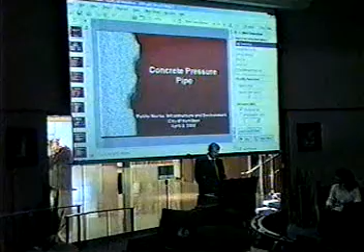My presentation this morning is a follow-up to a presentation you had a few weeks ago regarding the supply of large diameter pipe for your water main. Until very recently, concrete pressure pipe was the sole product specified in the City of Hamilton. The committee has chosen to change that a little bit, and we're here to talk about our products and make sure you know who we are, and if there are any issues with our products, that we're able to address them.

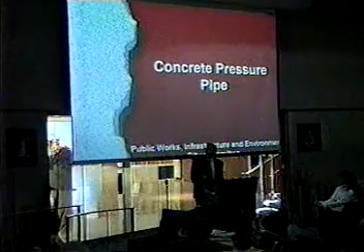I'm going to start this morning. This is our first slide. The second slide is a history of the industry, and you'll notice we track the history of concrete pressure pipe in Ontario from 1943 to present. Up until a few years ago there was always at least two manufacturers of concrete pressure pipe in the province of Ontario. That is again the case, but for a couple of years there was only one, through amalgamations and mergers. So our history goes back to 1943, and it's a product that has stood the test of time.

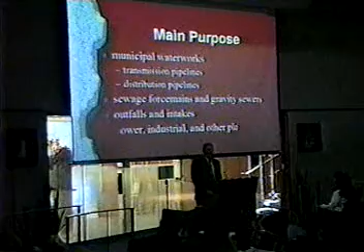The main purpose for concrete pressure pipe is municipal waterworks. It is the primary purpose, and it is in large diameter piping, for distribution mains and transmission mains, primarily for transmission mains, which are the larger diameter.

Morning, Councillor.

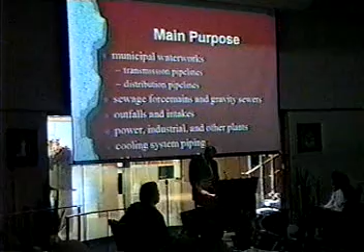In addition, concrete pressure pipe is used for sewage force mains, outfalls and water intakes, power, industrial and other plants, cooling systems, chlorine contact tanks—all very necessary to the longevity of our infrastructure here in Ontario.

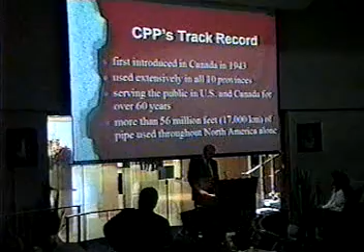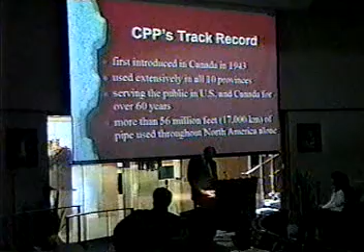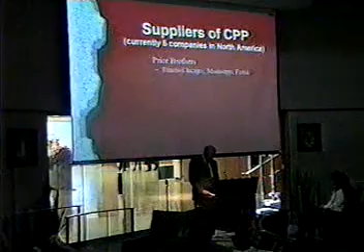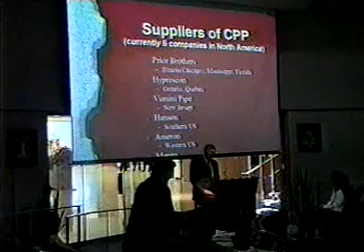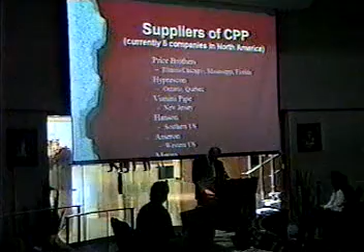The next slide talks about the suppliers of concrete pressure pipe, and this slide is North American wide, but I want to touch upon how concrete pressure pipe is specified throughout Ontario. It is always by open bid. There is always the availability of contractors to use anybody that supplies that product for the project under consideration. And in the last 3 years, the top 3 names on the list—Price Brothers, Hyprescon, and Vianini—have all supplied product in Ontario.

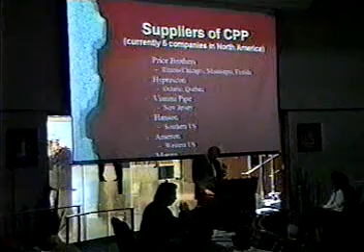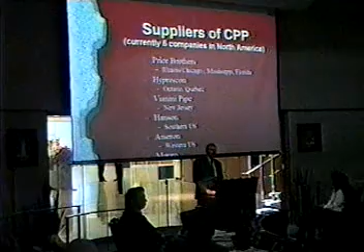In addition, at the bottom of the list you see Monroe. Monroe have just recently completed a new concrete pressure pipe facility in Barrie. So we actually have two homegrown guys now, and several others in the United States. So there isn't just one supplier of concrete pressure pipe—there's more than one, and it's a very competitive industry amongst my members, which is good for me sometimes and not so good at other times.

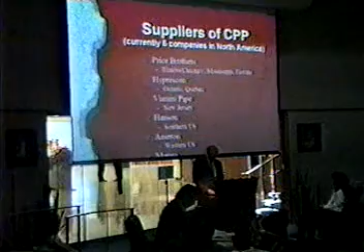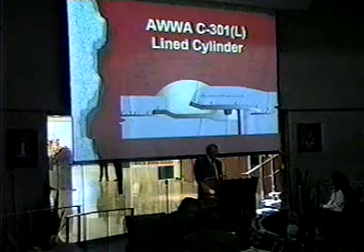The next slide gives you an indication of what concrete pressure pipe does, especially at the joint. You'll see that concrete pressure pipe is composed of steel and concrete, and the importance of our product is at the joint. The joint is made watertight through the use of a rubber gasket, and on the outside of the rubber gasket and the bell and spigot a diaper is placed, and it is mortar filled, so that prevents corrosion of the steel. There is no part of the steel component of the concrete pressure pipe that touches water, which is great for our product because it prevents corrosion.

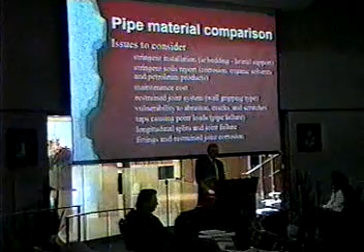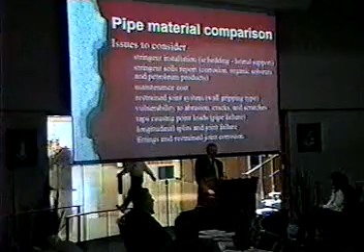The next two slides talk about material comparisons, and when you get into the use of different products for different infrastructure, there are several issues you have to address. The staff report you were given a couple of months ago, written by the general manager, talked about those issues and addressed them. We encourage the council and committee to consider all of those issues when considering different piping materials, because at the end of the day, that's where your risk is. Risk has to be managed, and managed in a cost-effective manner, and I'm sure the committee is prepared to deal with those types of issues here in Hamilton.

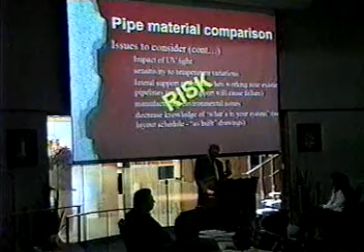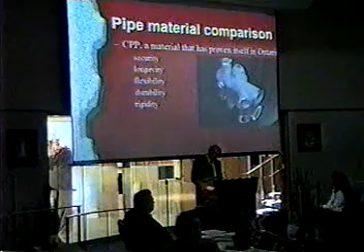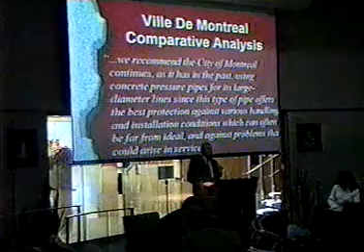On the use of concrete pressure pipe, there's a nice quote here from a City of Montreal report done by SNC-Lavalin. This report was done to review different pipe materials available on the market. Until this report was written, the City of Montreal used exclusively concrete pressure pipe. They did the report to identify other products for large diameter, and you can read the quote: we recommend the City of Montreal continue the status quo. This is the engineers, SNC-Lavalin, making this recommendation to the City of Montreal, for very good reasons.

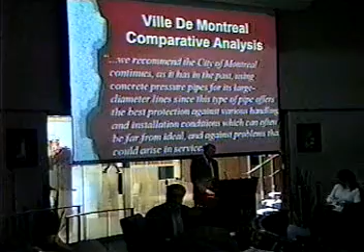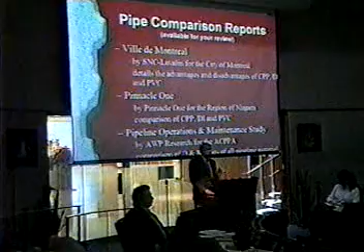This report is available, as well as some other comparative reports, now up on the screen: the City of Montreal report, a report done by the Region of Niagara, and a report done by the American Concrete Pressure Pipe Association. All of this information is available to you. I know your staff have it, but if you'd like your own personal copy, we'd be more than happy to help you with that.

My last slide, or second last slide, is one you would have seen a month or so ago. This is a comparison done between projects undertaken in the City of Ottawa compared to projects taking place in London and Kingston and another location. You'll also notice on the bottom of the slide it talks about an 86% cost differential between the jobs in the City of Ottawa and the jobs in other locations. That is for a very good reason: the City of Ottawa has an extremely conservative design standard, extremely conservative.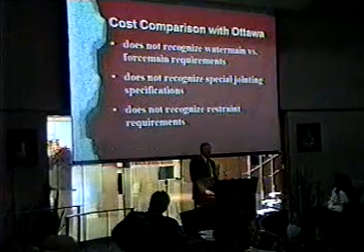If you want to just scroll through them, Gord. These are the issues that have to be asked when you're comparing any product, whether it be pipe or any product for infrastructure, and these are the issues that staff have to deal with on a project-by-project basis in order to select the appropriate product for the appropriate job.

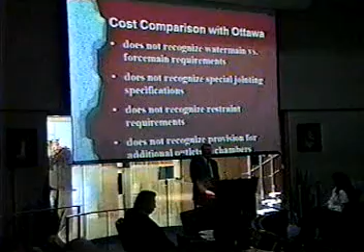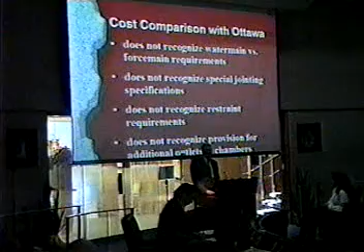And that's our message today. We believe the City of Hamilton has a great future in infrastructure, and as Leo has just mentioned, you're really becoming a forerunner in managing your infrastructure on a cost-effective basis. We think you should continue that, and we think concrete pressure pipe should be your number one pipe when you're talking about large diameter transmission and distribution mains.

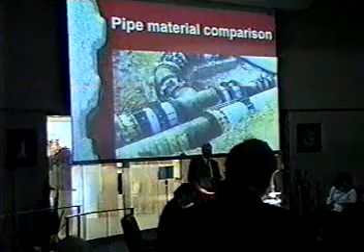Through you to the presenter, can you talk about guarantees, in the neighborhood of 20 or 50 years, because we're getting desperate for long-term value, and can you talk about maintenance in the meantime? I look at an oval that isn't round, and I think it's going to be a lot harder to clean that thing out. But that's, I don't lay that kind of pipe.

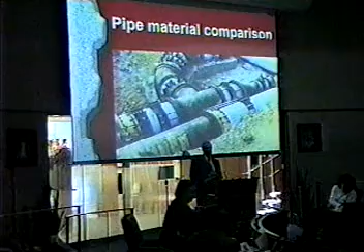Maintenance and guarantees, certainly. First of all, when you talk about longevity, studies by organizations such as the National Research Council of Canada and work done by the U.S. Army Corps of Engineers suggest that concrete pressure pipe has at least a 100-year life expectancy. That's good, because a lot of municipalities are spending on their infrastructure at the rate of 1.5% to 2%. So you're expecting our products to last well over 100 years. Our product is really good that way.

Secondly, one of the items in your package, from the American Concrete Pressure Pipe Association, covers a lot of work on maintenance and the ease of maintenance with concrete pressure pipe. Because it keeps its shape, doesn't corrode in water installations, and has a smooth inside wall, it has very good hydraulic characteristics and very good maintenance characteristics when it comes to spending money on it. So that's one of the real attributes about concrete pressure pipe, especially in the large diameters - it lasts very well and is low maintenance.